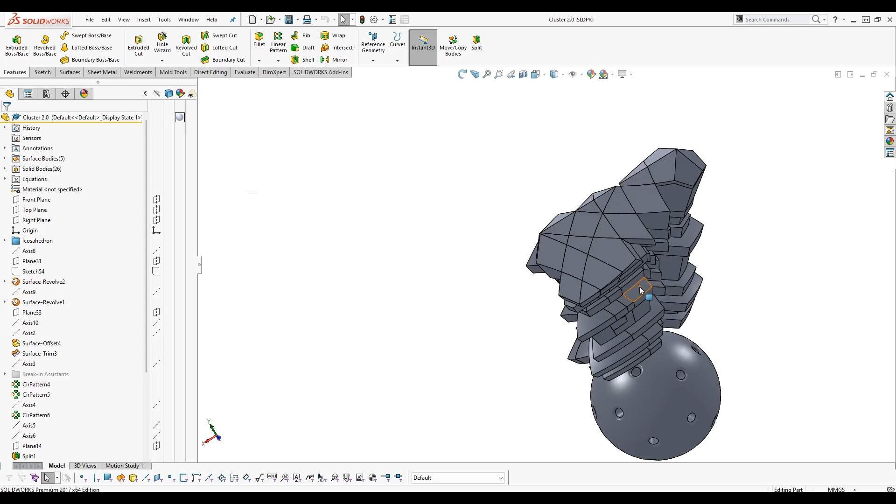What I've made so far is what engineers call a master model: a multi-body part that consists of one of each unique part on the twisty puzzle. This is an upcoming puzzle that I haven't presented yet because the first version didn't work so well. But this new mechanism is looking better, and so I'm ready to start the cleanup process so I can get it printed. Cleanup is a long and involved process, and it often takes many hours to implement.

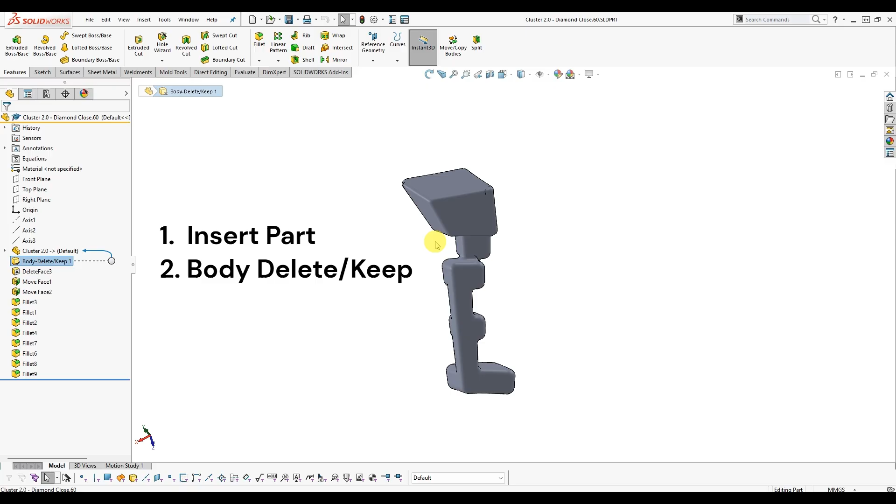This is what we're going to end up with by the end of the video. You can see each of these steps of it in the final result. We're going to insert the part. We're going to delete down to the part we need. We're going to delete faces to clean things up. We're going to move faces in a few different ways. And then we're going to do a whole bunch of fillets.

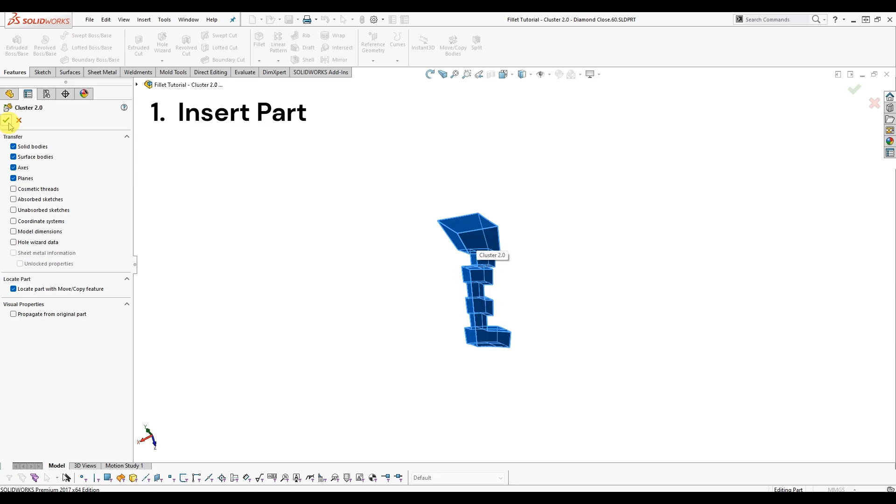So let's start from a clean part. The first two features in a parts file will always be an insert part and a body delete or keep. Insert part pulls in the whole master model file. You can just select whether you'll include the solid bodies, the surface bodies, the axes, the planes, cosmetic threads, all sorts of things. It's pretty unusual to need anything except for the solid bodies and surface bodies. Sometimes I bring in the axes and planes. In this one I actually brought all of it in.

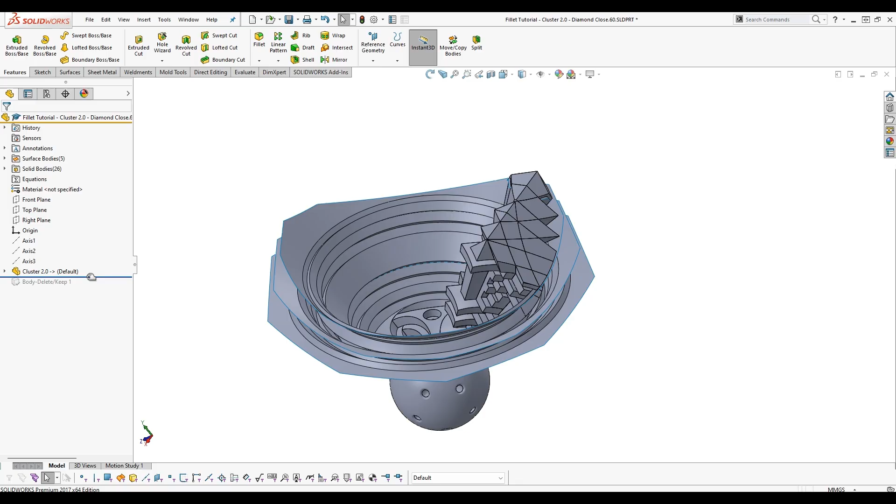And if I scroll back here, you'll see that it actually brought absolutely everything in, including these surfaces that I use to cut the parts, which are sometimes useful in the cleanup process. But in this case, I don't really need them. So the second feature is the body delete/keep. This lets me delete down to just the part I want in this file. I usually do keep bodies. You can do delete bodies, but that makes you have to select the things you want to delete. Here I say keep bodies, and I just select the one that I want to keep, which is a lot more efficient. I hit OK.

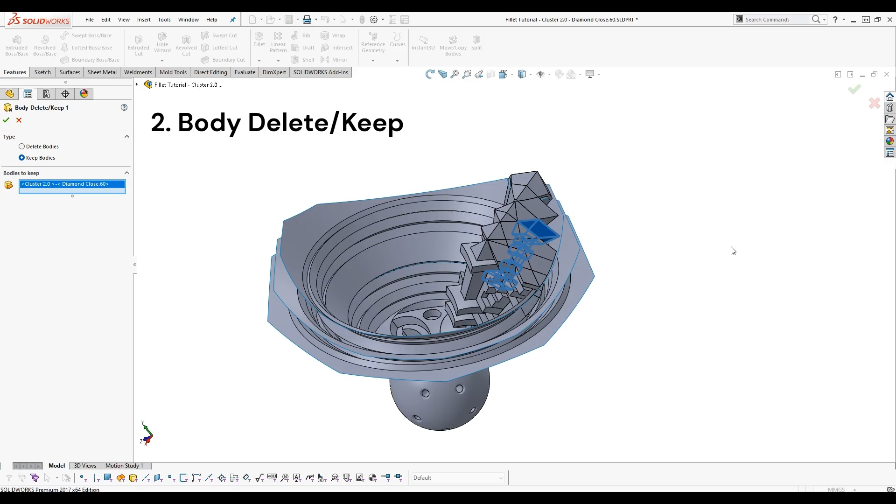When I'm starting the cleanup process, I usually save all the parts out in quick succession, and I do it like this. I start by putting these two features into the model. I go to insert part, select my master model, and then hit submit, and that puts this in here. Then I do a body delete. I go up to the solid bodies folder, find the one that I want to keep, and say delete/keep body. You can also access that by turning on your selection filters toolbar and selecting bodies, and then you can right click here and say delete/keep body. I always have this toolbar visible because it's useful.

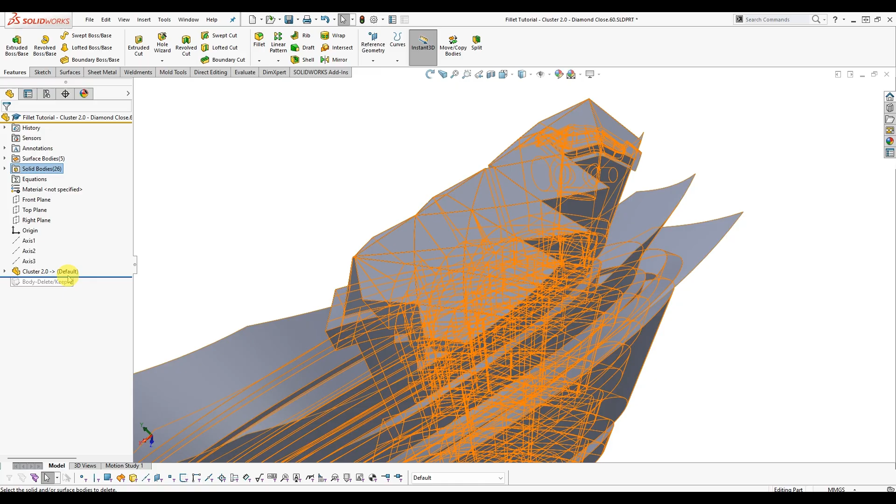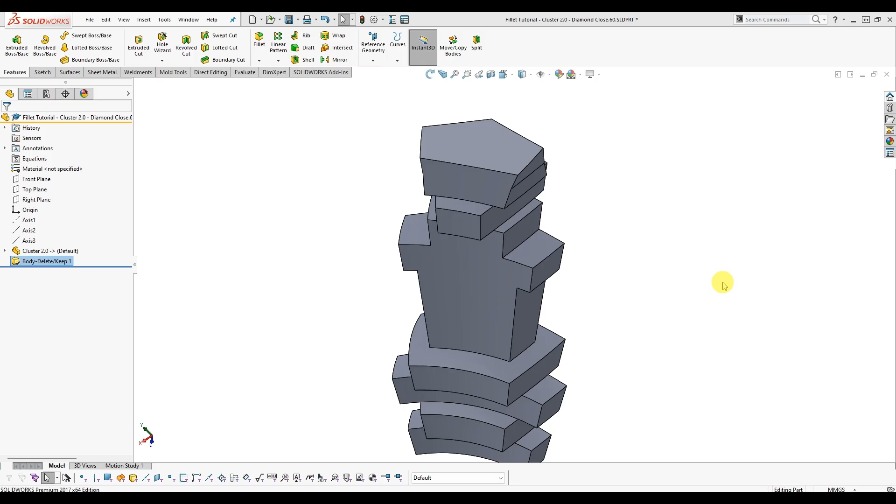Alright, in any case, let's scroll back. Now I've only got one part, so what I do is I go and edit the body delete, choose the next part, and then I do a save as to the name of that new part. I'm not going to do that now. I've already done it for the rest of the puzzle. But I just do that in quick succession until I've gotten through all of the parts. This puzzle has 26 unique parts, so it kind of takes a while. But I want to get all of them into place. And then I start into the first stage of cleanup.

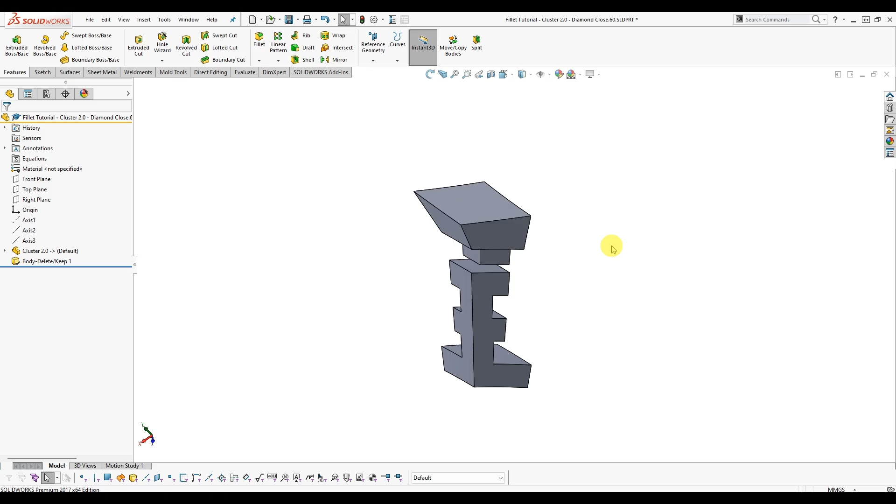The process of making a twisty puzzle in Solidworks always leaves a lot of faces that are unnecessarily split, like this. These are all tangent to each other, but for some reason they're split up. And that happens in several different places on this same part, including underneath and above.

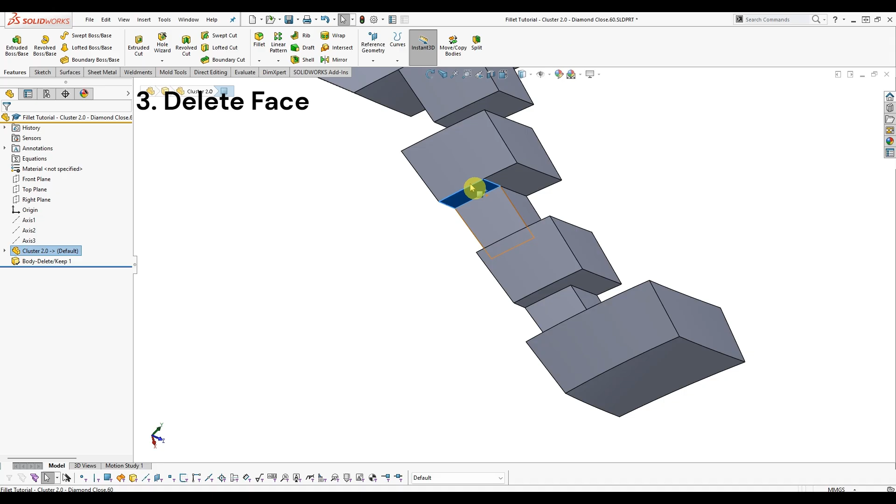You can see the edges of those split faces by going to View, Display, Tangent Edges Visible. I'm very used to seeing these things, so I actually keep the view of them off. I'm very used to knowing that they're there, but for this tutorial I'll put them on because it helps you guys see it. What I'm going to do is a rather finicky feature, but I've discovered some good tricks to make it work pretty consistently.

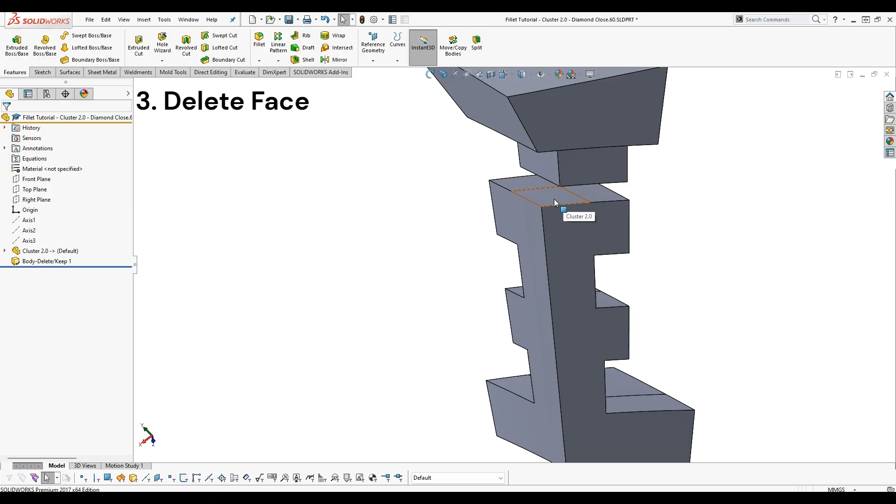Right-click on one of the faces and click Delete. It's under the Face section. You may need to expand this. So click Face Delete, and now you're in the Delete Face feature. And then you select all the faces that make up that split face, except for one.

The exact one to leave behind doesn't exactly matter, but I've found that SolidWorks can be kind of picky about this. You have to do some experimentation. Actually, occasionally, if you just select one of them, it'll work, but that's only if the other ones are completely disjoint. But in any case, show preview sometimes works, sometimes it doesn't.

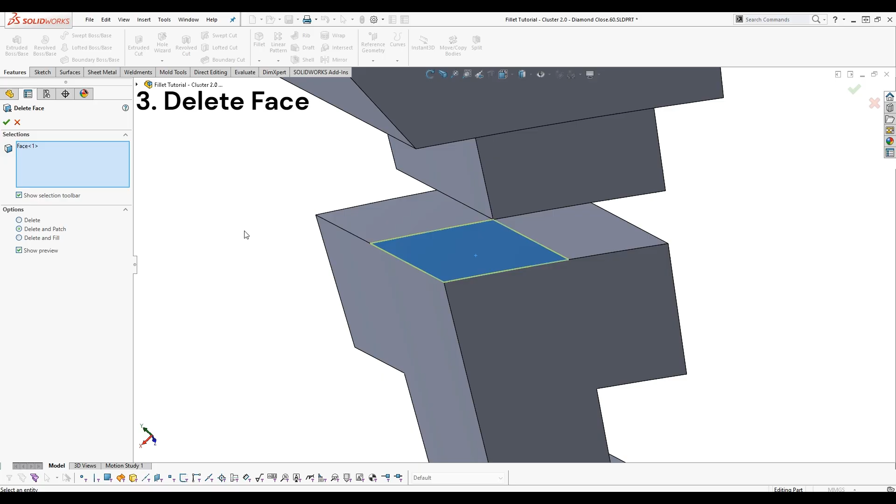But really, the point here is you select Delete and Patch, and then you hit Enter. And now we're left with a single face. That's the goal. You want to have a single face on each of these. So I'm actually now going to go back into that Delete Face feature and move on to my next one. And try that and hit Enter.

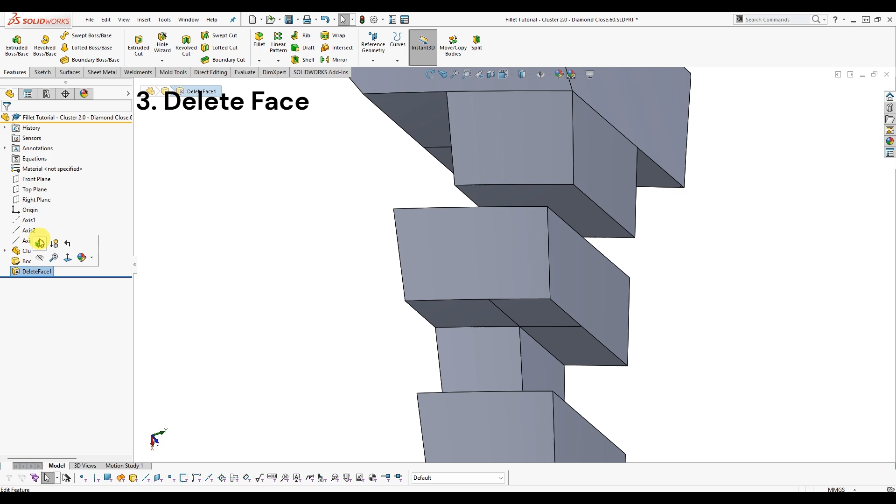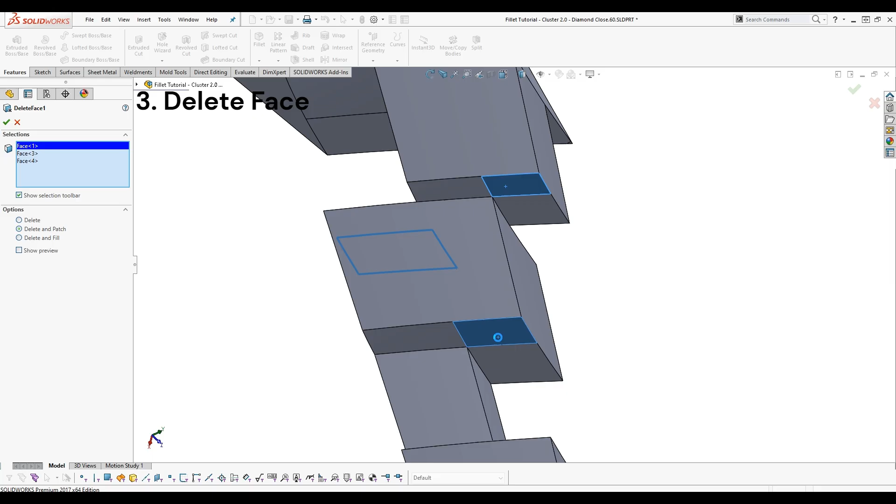Good, that one's solved. Now occasionally it won't, which is why I'm only doing it one face at a time. But if I go like this, it may not solve. Oh, it did. Let's see if I can get an example where it doesn't. Okay, well, we'll see if we come across one. But in any case, the goal is to end up with each of these things being just one face. So I'm going to quickly go through that right now.

And again, I'm checking each time to make sure. Let's see if that works. Aha, there's a time when we get a rebuild error. For some reason, it doesn't like this, so I'm going to try that. Great, it liked that. All right, so we've got one face on each of these.

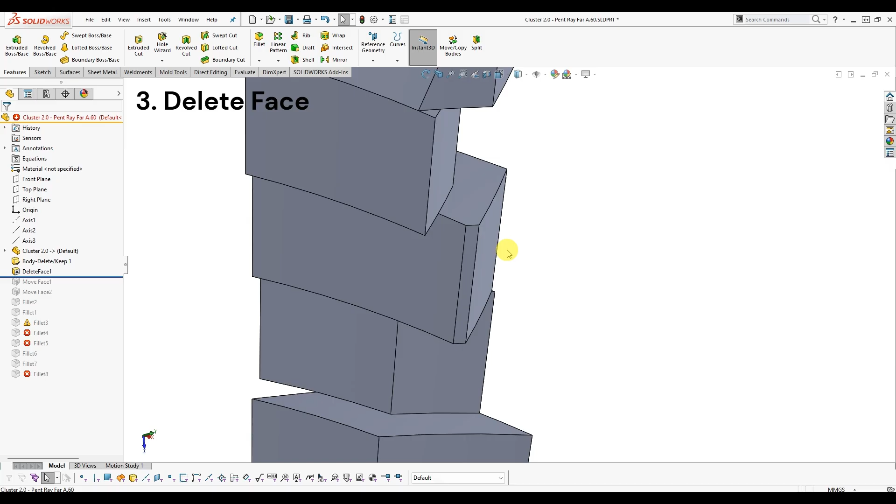Delete face is also useful for slivers like this. I've opened another part to show it. Without deleting that face, there's just this little sliver here, and that's going to make fillets really complicated. And so what I do is in my delete face feature, I also include this guy, and now it ends up straight. And the fillet that I'm going to end up putting on this edge is going to just blast right through the material that I just added, so it's no big deal.

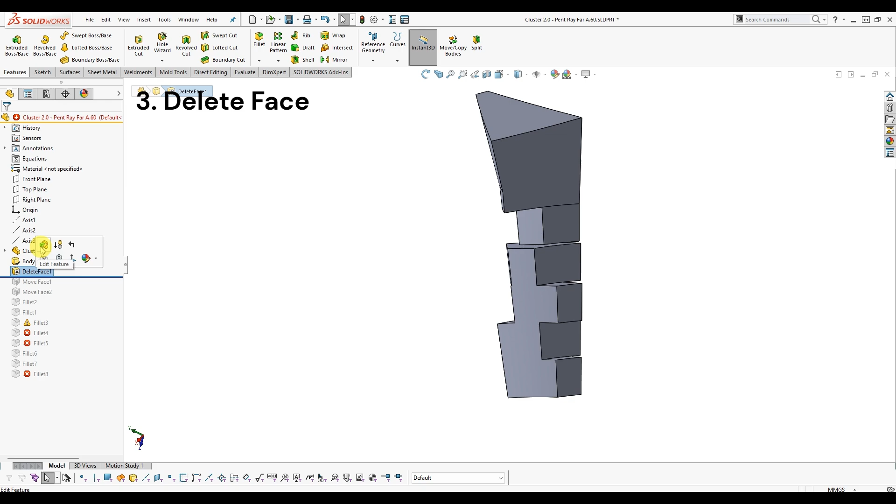And you can even get away with it on something like over here. I've actually already gotten away with it over here, so I got rid of this sliver as well. So it's very useful. It makes the faces that are next to it extend until they meet each other. You see that? So they come to an edge like that, and that makes it so that I only have to select these guys in order to fillet it.

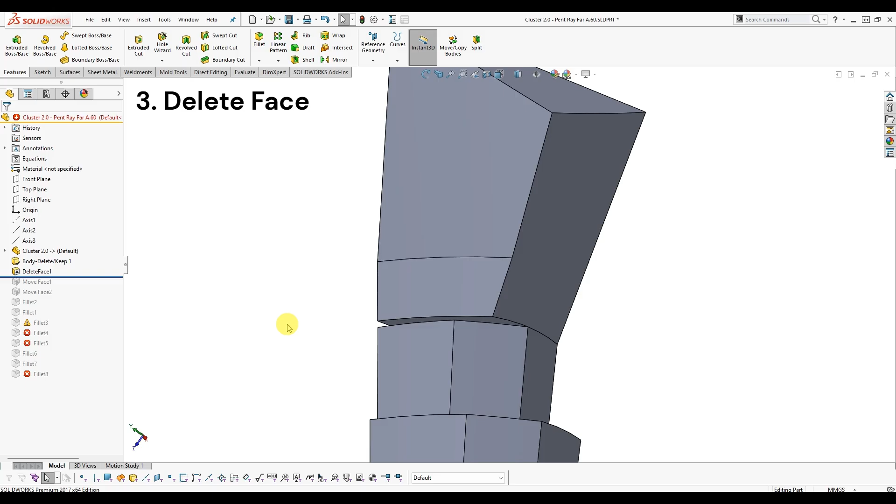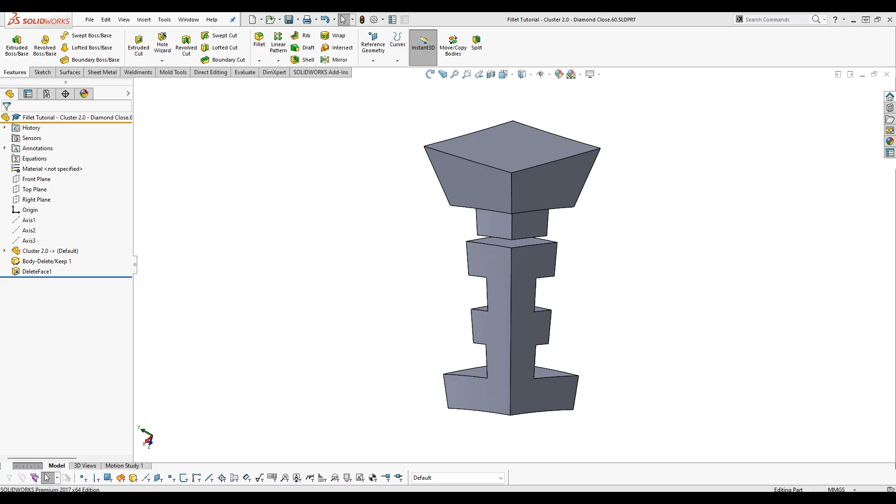So let's move on. Let's go back to the other part. Okay, so we're back here. Gonna hit save. Always good to save a lot. Once you're done cleaning up faces, it's time to move on to clearances. A mech puzzle needs to have clearance in specific places throughout the mechanism. You may have heard this called tolerance, but as an engineer, that word means something completely different to me, so don't get me started, just call it clearance.

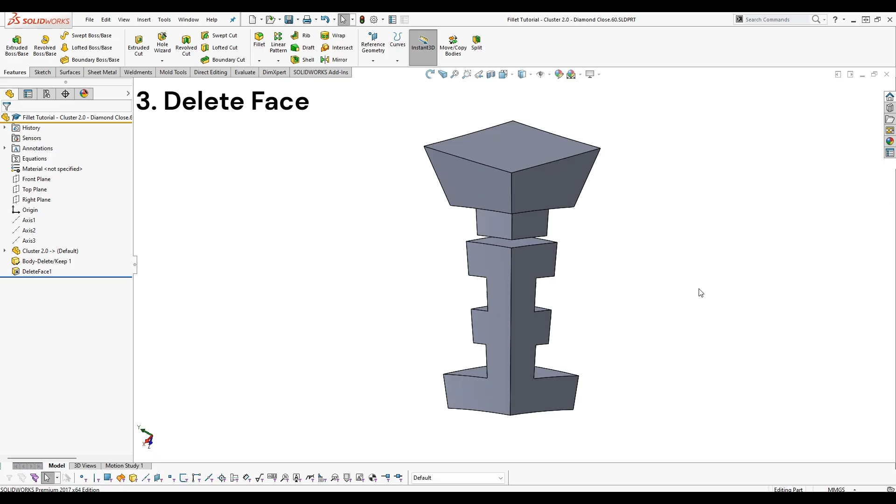In this video, I'm not going to go into why I pick certain faces and leave others alone. That's a topic for another video, which I might make someday. But what I'm going to show you in this video are two very important steps that will help make fillets more streamlined later. All pieces should have a move face feature for clearances. I usually do 0.3 millimeters for SLS puzzles.

I'm going to put the clearances on this face and this face. There might be another one that I end up doing a little later. I haven't worked all of them out for this puzzle yet, but let's just assume it's these ones. So I do flip direction. 0.3 millimeters. And so you see it's going to shift this face upwards and this face upwards.

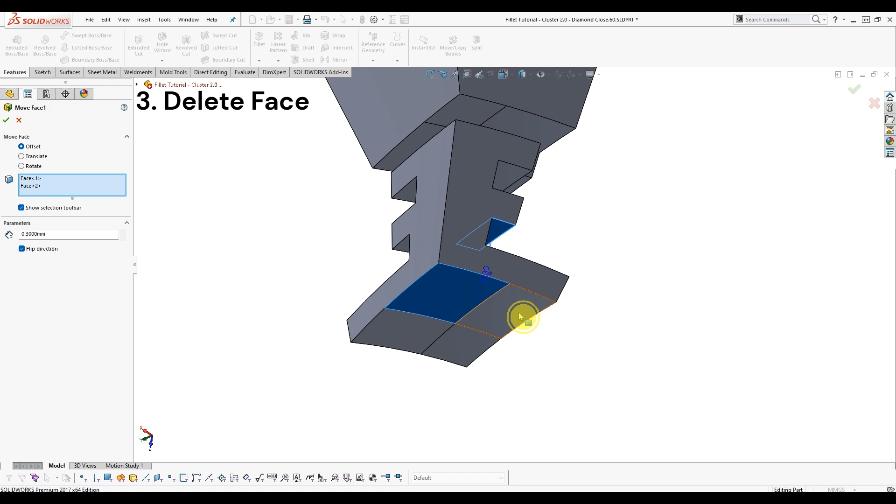And since we already deleted the faces, it's actually going to make this a lot simpler, because before deleting those faces, notice we would have had to select 4 things on this face and 3 things on this face to get the same result. So doing those delete faces makes this step a lot simpler. So I'm going to unsuppress that so that everything solves.

Okay, now many pieces, including this one, will need a second move face feature for a different reason, but let's skip it for now, and we'll come back to it when we realize it's needed.

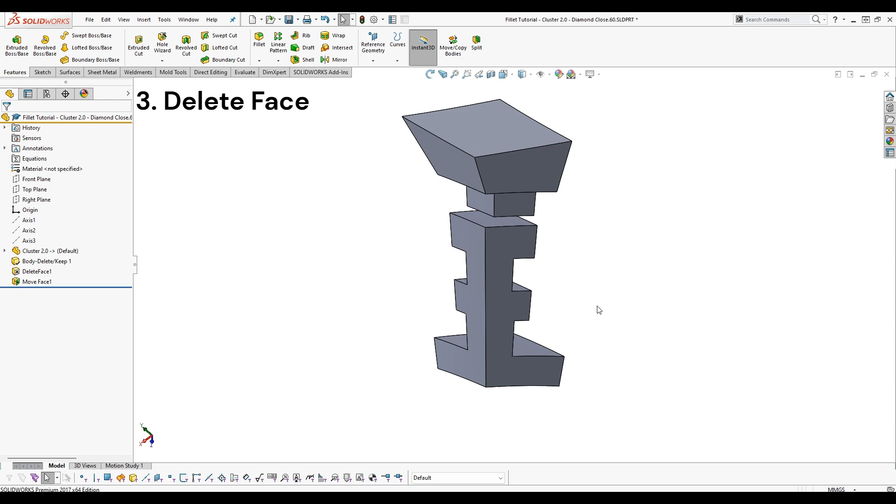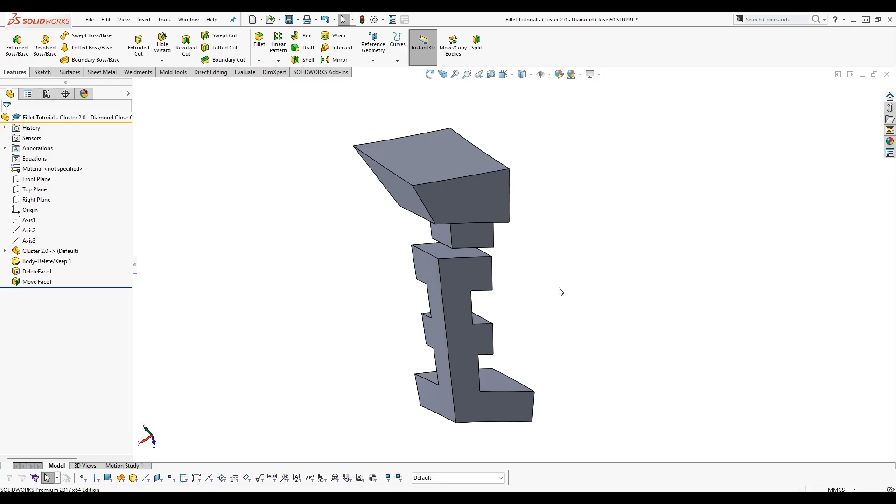Now it's time for shells. This is probably the best place in the model to shell if needed. If you're doing SLS, it's good to shell the parts to about 0.8 millimeters to 1.5 millimeters to save material cost. If you're doing FDM, completely skip shells. I like to shell before fillets, and just to make sure that my fillets are never bigger than the thickness of the shells to avoid any self-intersecting geometry.

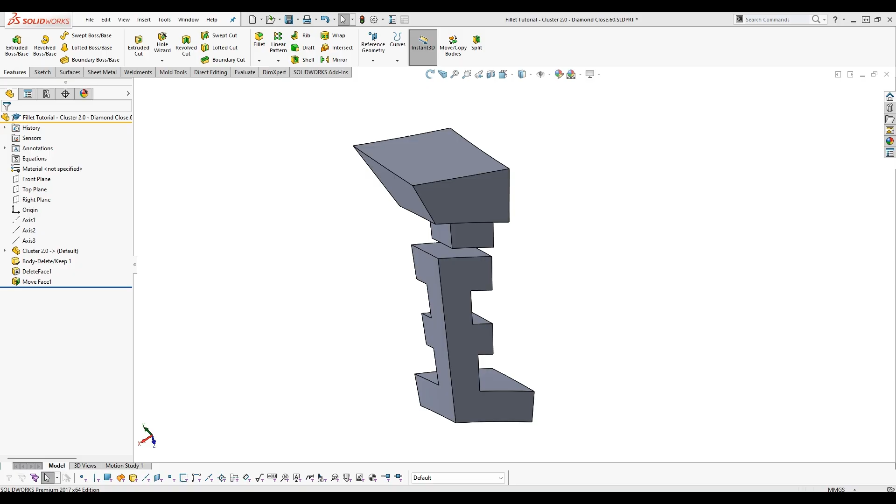I'm not going to shell this part at all, since it's already super spindly, and it really doesn't need to be any lighter. So let's move on to the star of the show, fillets. For my puzzles, I like to do my fillets in 5 stages. Prep fillets, radial fillets, shell fillets, reinforcement fillets, and face fillets.

There's a lot of nuance to how the fillet tool works, and it takes years of practice to understand what makes it break. In my nearly 2 decades of designing puzzles, I've come up with a workflow that's pretty resilient to minor mechanism updates that I may need to make, and it really cuts down on the number of fillet features in each file. That saves me a ton of time. So this is the order I usually do fillets in, but let's actually start by explaining shell fillets, as it will help motivate the reason I do these after I finish prep fillets and radial fillets.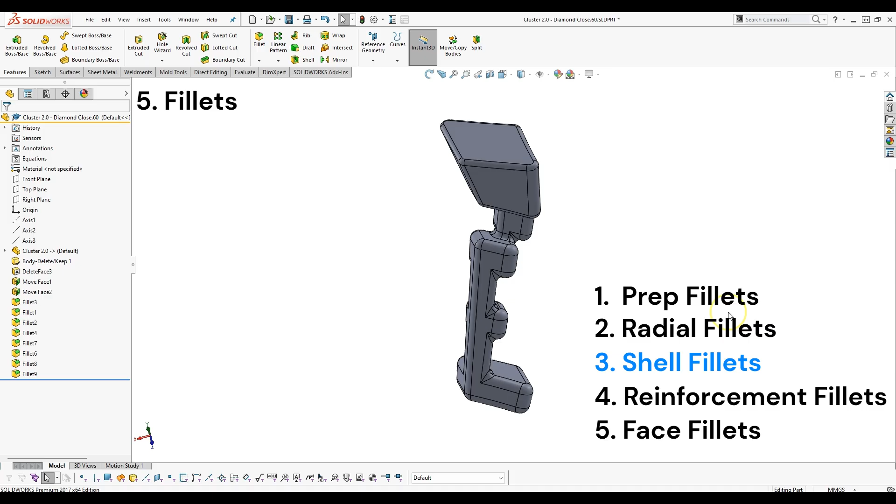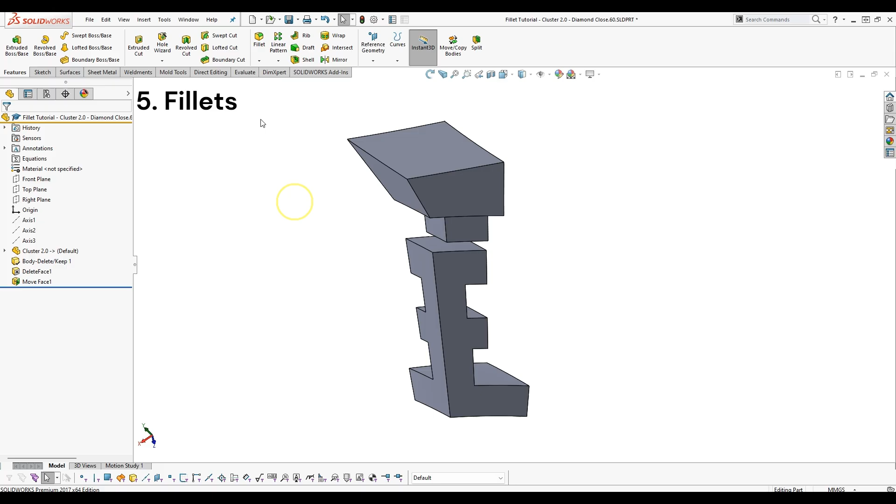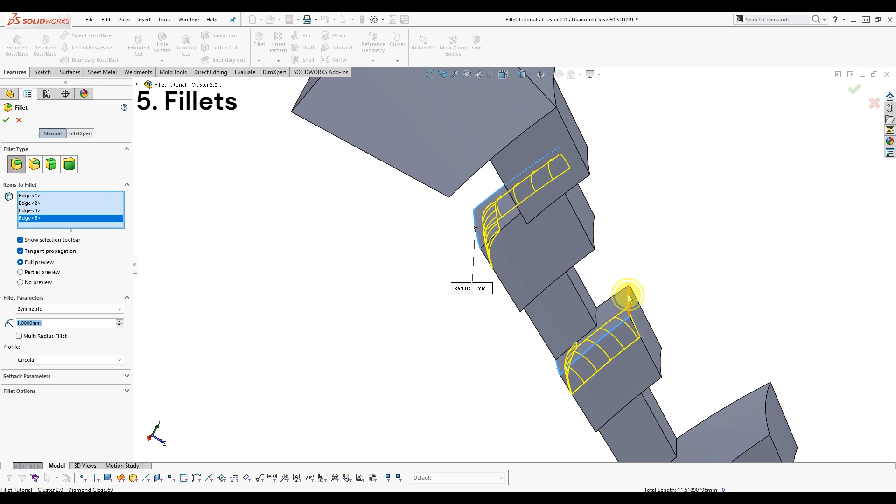These are shell fillets. Shell fillets are the convex fillets that go on the curved edges of each shell. You could start with these fillets. So you could start with these, say 1 millimeter, but there's a few problems with them. First off, it involves a lot of clicking. No one likes a lot of clicking. Like, I have to click each of these individually.

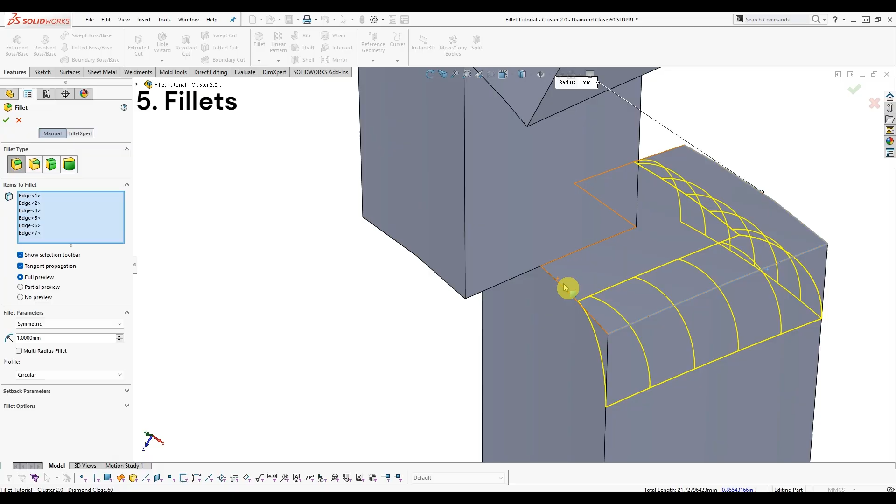Second, you can't use a single fillet feature to do this edge right here. You can do this. Oh, you can't even do that one. Fun. This will actually make it break because these 2 surfaces are co-radial, and it doesn't like that. So we need to fix something there.

And finally, selecting a lot of individual edges makes it a lot more vulnerable to rebuild errors if you make even minor changes upstream. So the way we minimize the number of clicks during shell fillets is by carefully preparing the model to take advantage of a thing called tangent propagation, which is this checkbox right here. But I'm getting ahead of myself. Let's rewind back to right after our move face feature and talk about prep fillets and radial fillets.

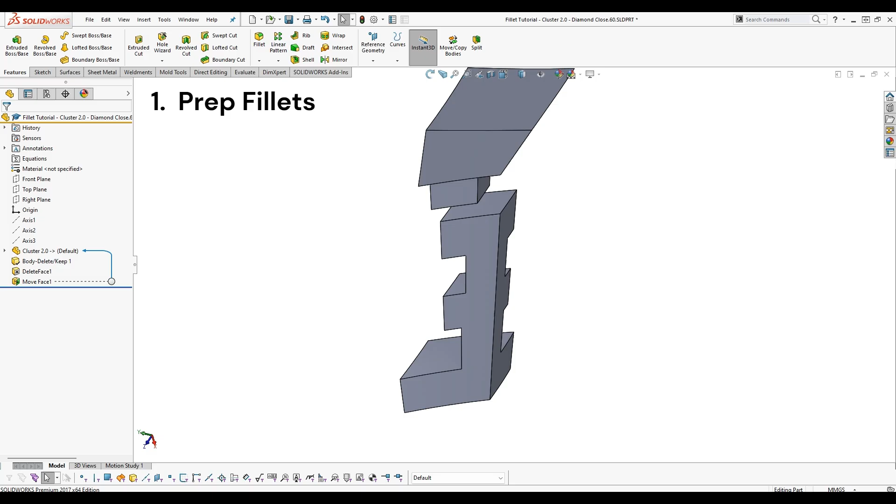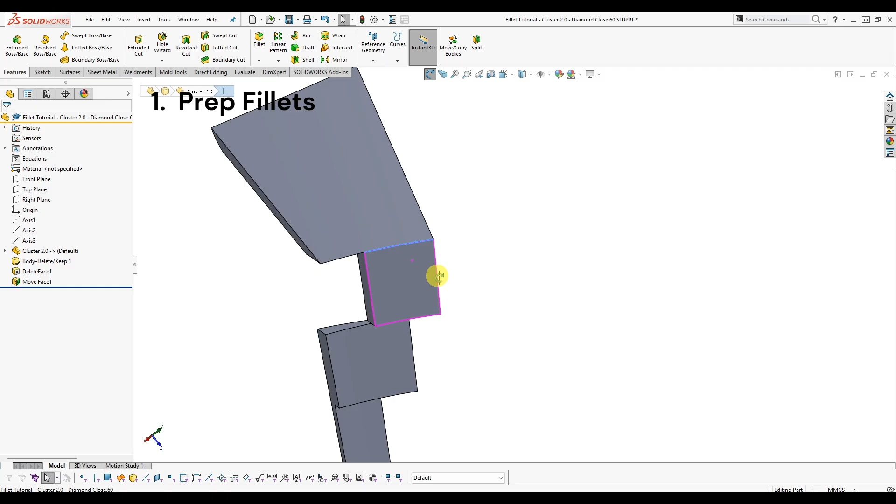In most twisty puzzles, there's usually this outer section of the cut, these faces right here, where the transition to that part of the cut results in edges like these, where these are conical surfaces. These might be conical surfaces, but these surfaces towards the outside aren't actually coincident with the origin of the puzzle, usually. And so that creates this little transition here. And I like to fillet that first. So the first fillet I do is usually a 1mm transition fillet right here.

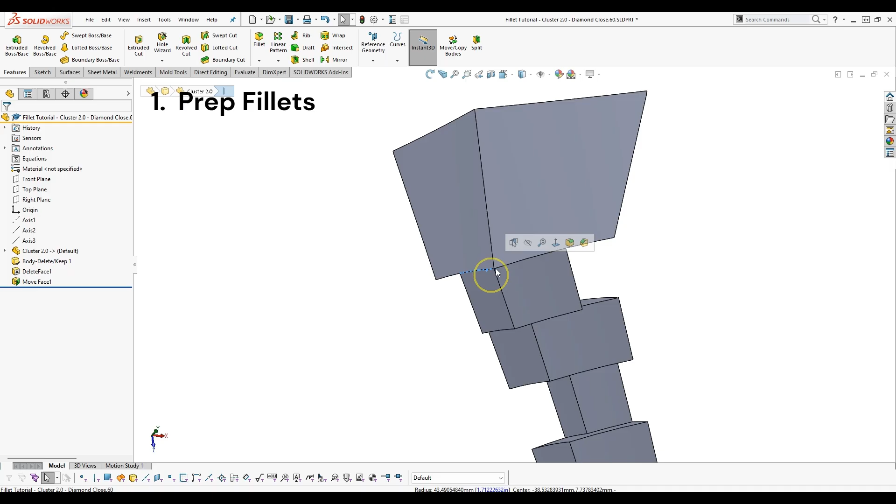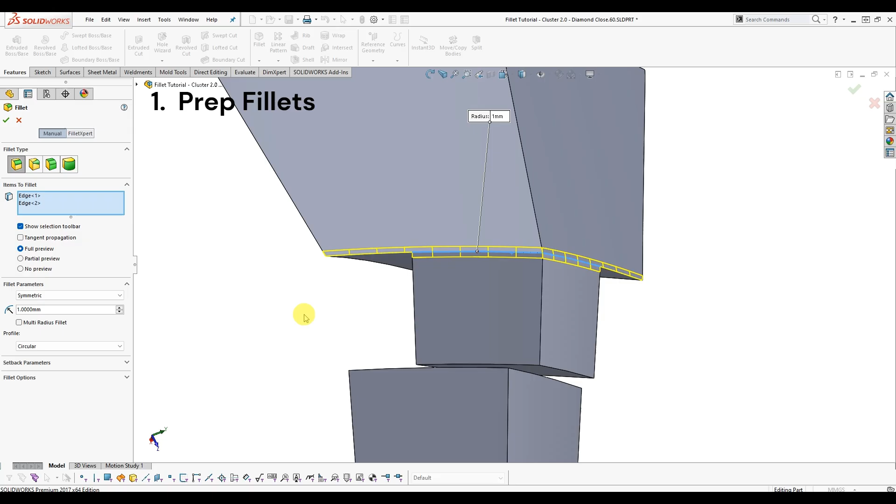So let's fillet these guys. And we have a little bit of a, oh wait, that was 10mm. Hey, one still won't solve. Okay, fun. For this one, we turn off tangent propagation, and now it'll solve. Okay, cool. Again, nuances. So some of these pieces will actually have a concave edge right here. Putting a concave fillet on it.

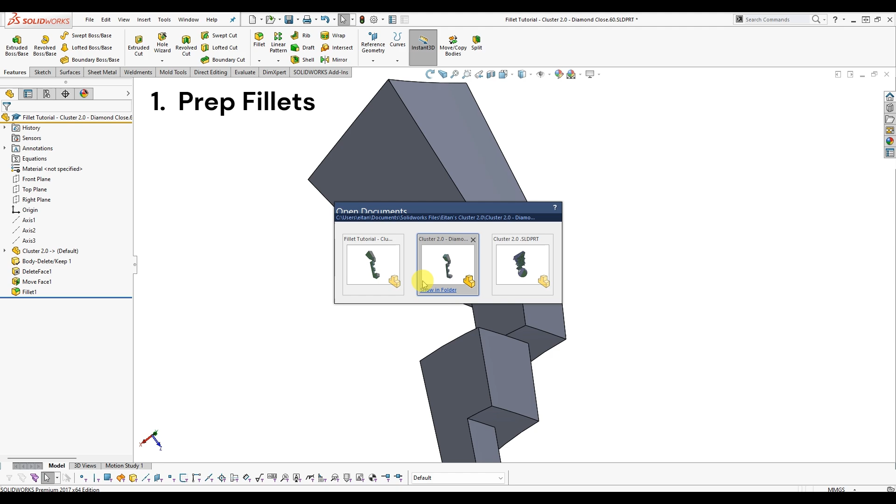I'm going to go back to that other file I had open. And you'll see that the first fillet I put on here is a concave fillet. Let's ignore this guy. So right here is a concave fillet. You might be surprised that I put a concave fillet on here. Won't that interfere with the piece that's next to it?

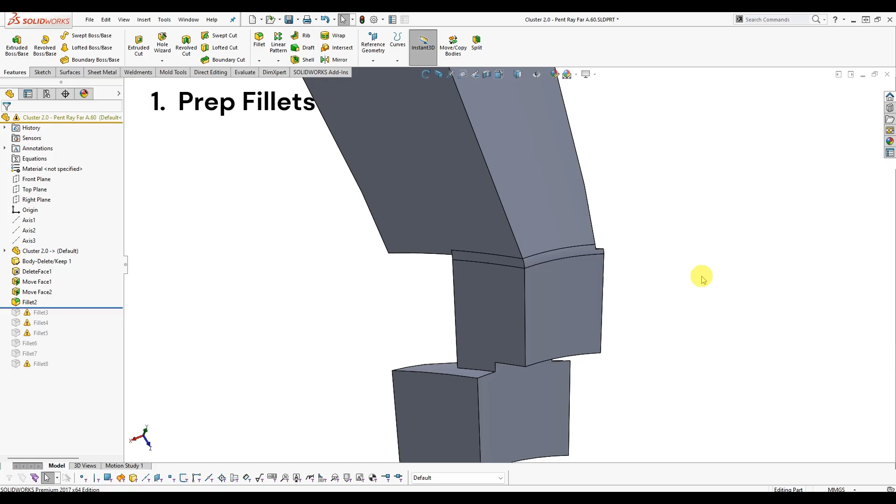But don't worry. There won't be any interference with the part next to it as long as it has a convex prep fillet of equal or greater radius in the same spot. And it will, because these are really helpful for simplifying the rest of the puzzle cleanup down the road. So let's go back to that other piece. So now we've got those prep fillets right there.

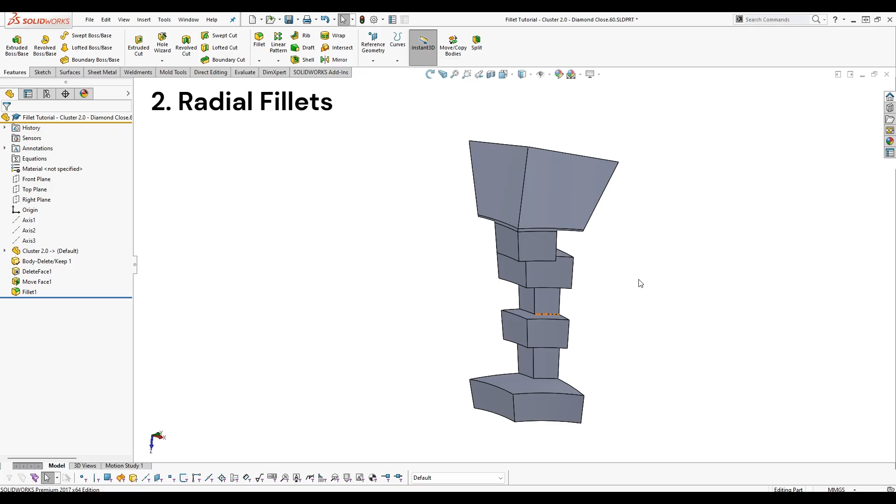And let's move on to the meat and potatoes of the filleting process, radial fillets. This is the step that's going to require a lot of clicks no matter what. And it sometimes requires more than one fillet feature with different radii. I start by trying to put a 1mm fillet on every radial edge I can. On puzzles with fewer parts and puzzles with bigger parts, I've gone higher, 1.5, 2, sometimes even as high as 3.

Some of these edges down here, I might try to put a 2mm fillet on, but let's just do a 1mm fillet everywhere we can. Now, notice this little window that keeps popping up every time I click on something. That is called the selection assistant, and it's actually really useful.

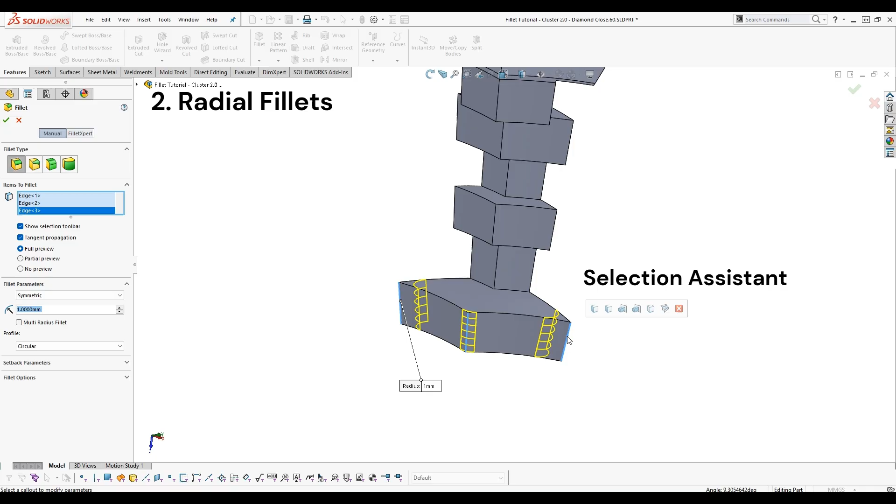When I hover over these buttons, it highlights different groups of edges. So some of these are a lot less useful. Like this is all convex edges. That's too many edges for right now. It won't solve. This is all edges. These right feature, left feature, internal to feature, those are a little bit complicated and I don't really use them often. What I really use often are connected to start face and connected to end face.

They don't always both show up, but what's nice is notice I clicked this edge and it's saying that these other 3 edges are connected to that start face. So I'm going to click those and it's selecting all 3 of those. But you know what? I don't really want to select those right now. I think I want to use a smaller fillet for that area, because it's eating away at a lot of it.

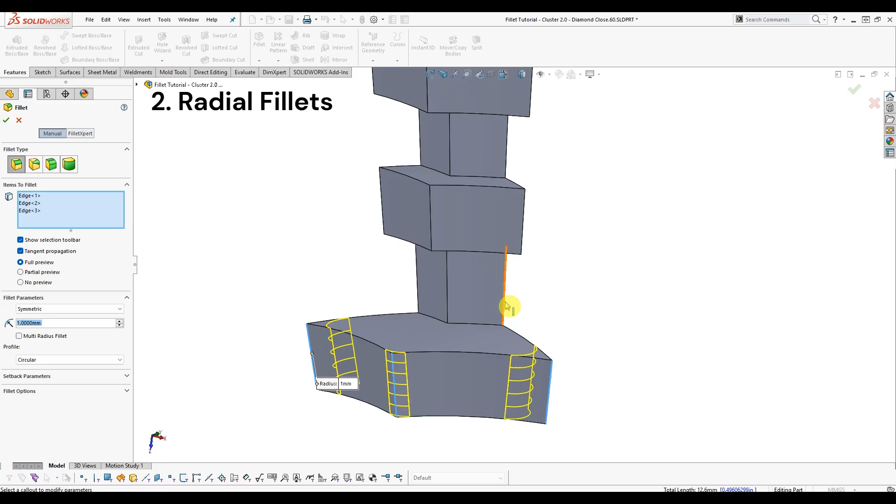Notice I'm going one edge at a time, except for these selection assistant things. But I'm going one edge at a time to avoid things that are going to break my model. Because if these yellow previews disappear, it means that the last thing I clicked made this feature not solve. So I'm going to actually skip these guys and maybe do these ones.

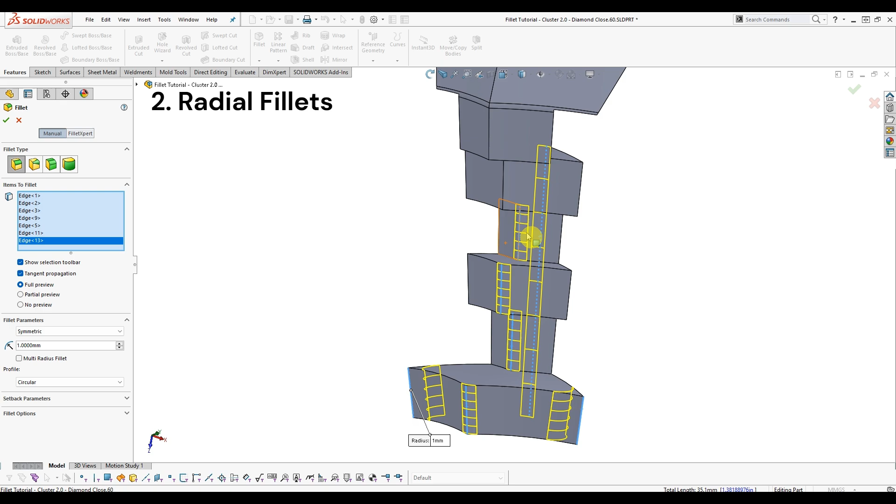See, all the previews disappeared. That's probably because these edges ate away at my model. Okay, so what I'm seeing is that these guys are going to need smaller fillets over here. So I'm not going to worry about these yet. But I think I can do this one, this big one here. I want a 1mm fillet everywhere I possibly can.

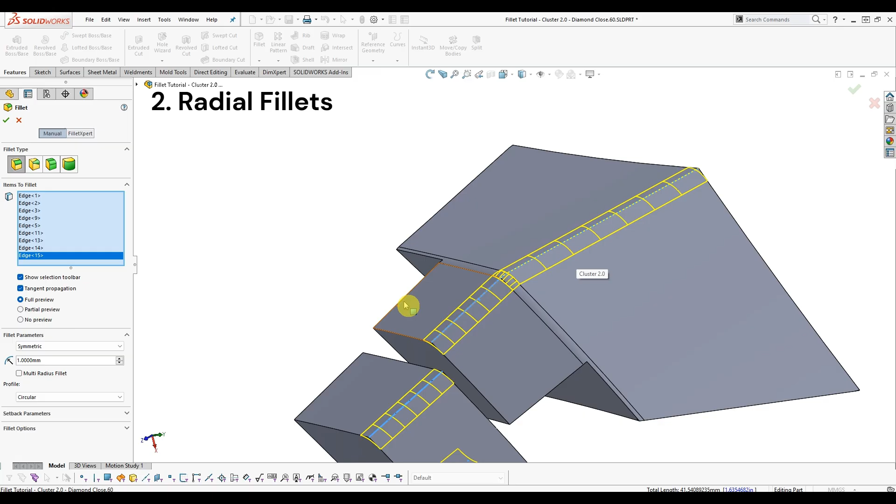Alright, so now here is the benefit of doing that prep fillet. Notice that before that prep fillet we would have had to select both of these. But because we have tangent propagation checked, it's going to actually spread across the rest of this edge. And I only have to click once, where otherwise I would have had to click twice. Every click matters. It's nice to skip clicks when we can.

So I'm going to do these. I'm going to do all of these up here. All these radial ones. And notice it propagated all the way down through here because I have this fillet here. Okay, and I think I might do these ones. Oh no, it's going to break.

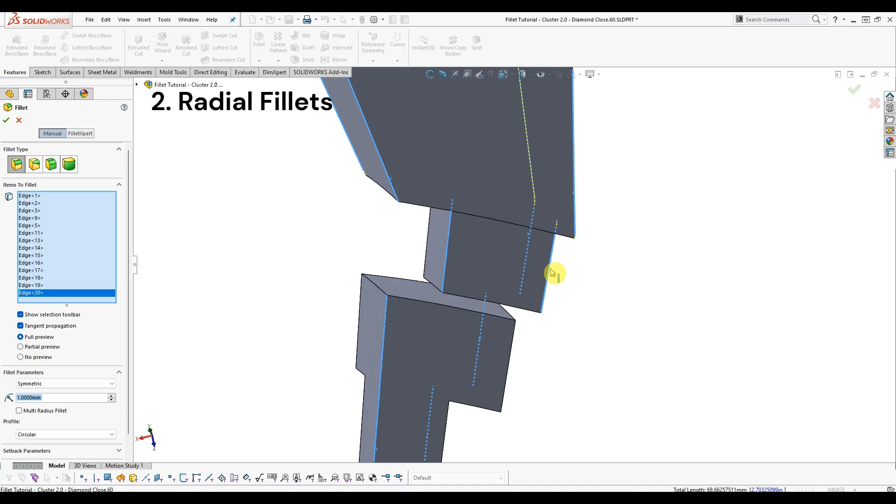Alright, now when something breaks, what I do is I actually lower the size of this fillet and I watch as it kind of sweeps through this. And I try to understand why is it breaking. The reason it's breaking is because the fillet is about to cross this point right here. Right there. So I'm going to unclick that one, and I'll do that one in a second fillet feature.

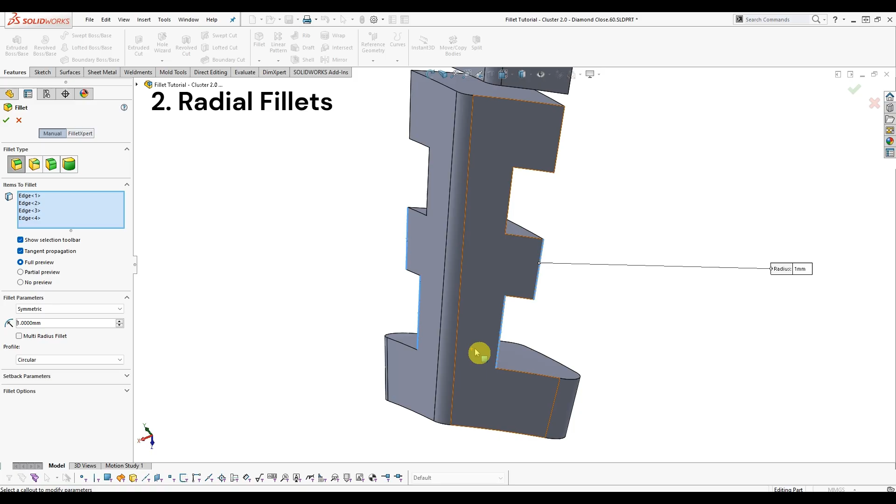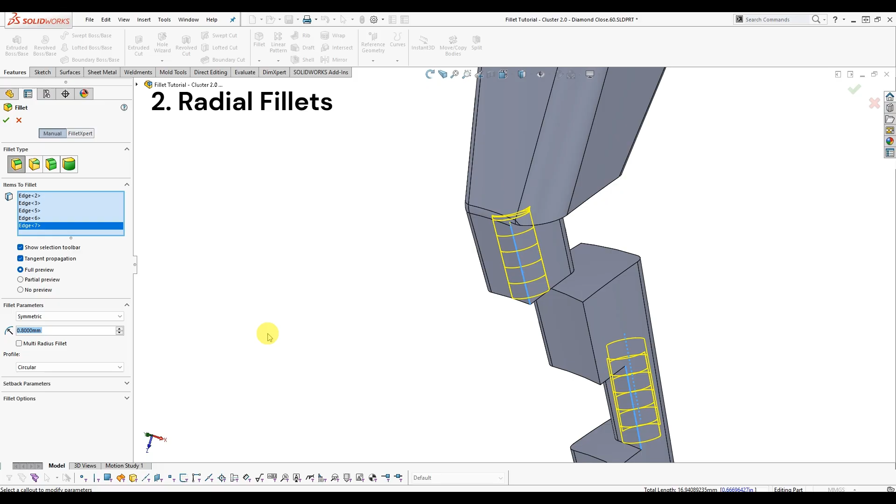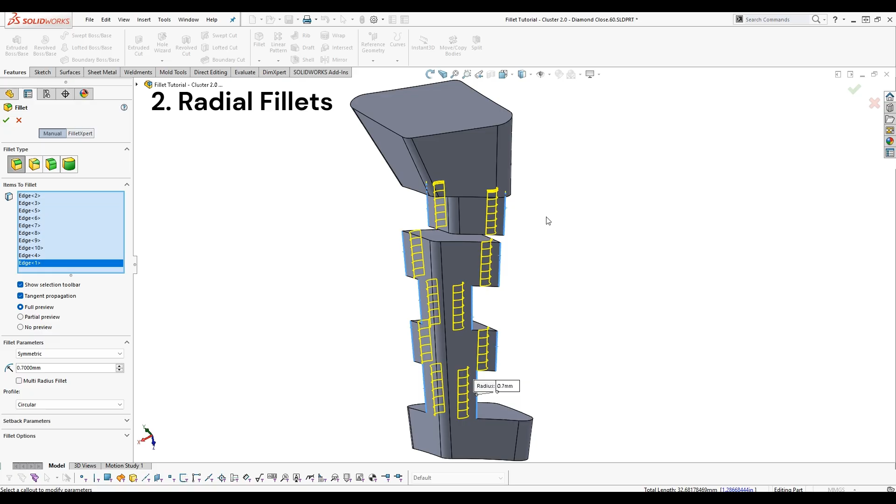You hit enter, and let's do another fillet feature at 0.8. How about that? And, oof, this puzzle has a lot of small pieces. So I'm going to do these guys. Oh, that's better. Ooh, it still doesn't like that. Let's go down to 0.7. Sure. Alright, I think that's everything. That's all my radials done.

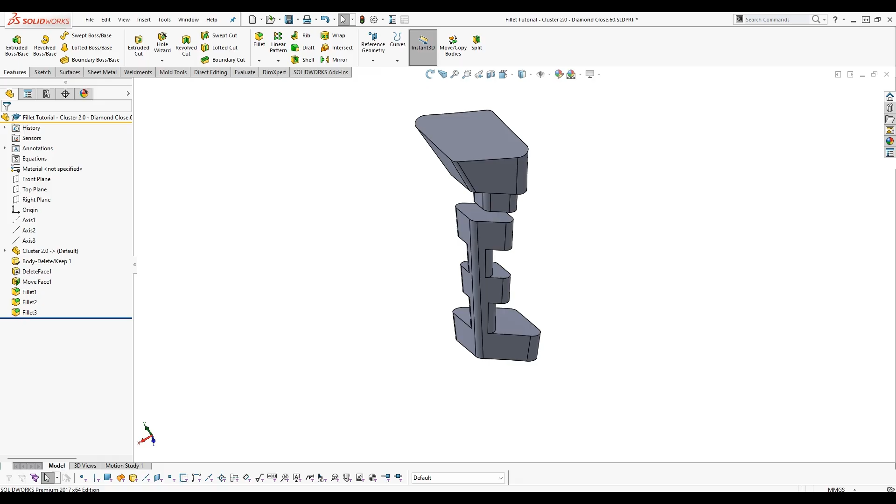And so let's move on to shell fillets. Because of all the preparation we've done already, I can usually do the shell fillet in a single feature with very few clicks. So, see how when I click one of these edge segments, it does the entire shell edge. That's because we already put in these radial fillets, and so tangent propagation makes it select the whole thing. This is great, but I can do even better.

A good thing to know about Solidworks is that it is much better at keeping track of faces than it is at keeping track of edges. So, for the remainder of the cleanup steps, I'm going to find every opportunity to select faces instead of edges. When I select a face, the fillet tool will throw a fillet on any sharp edges connected to that face. Since I already put fillets on these two edges, that just leaves the shell edges connected to that face. So I just have to select that one face.

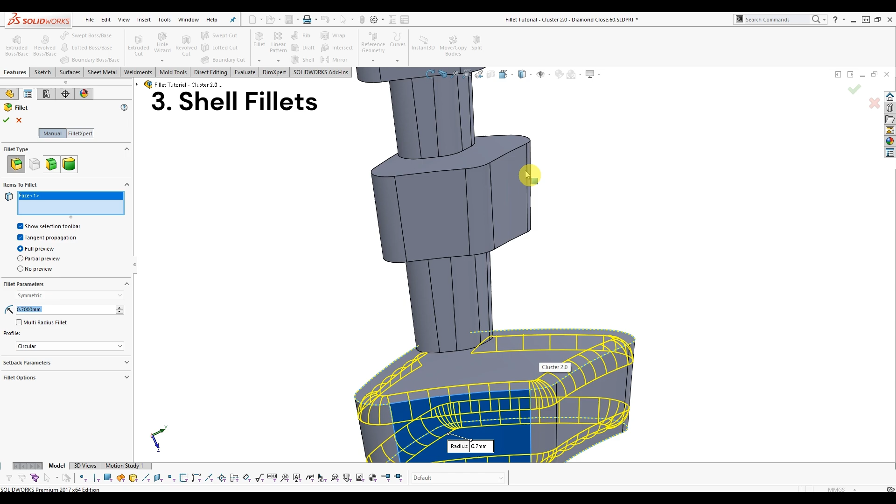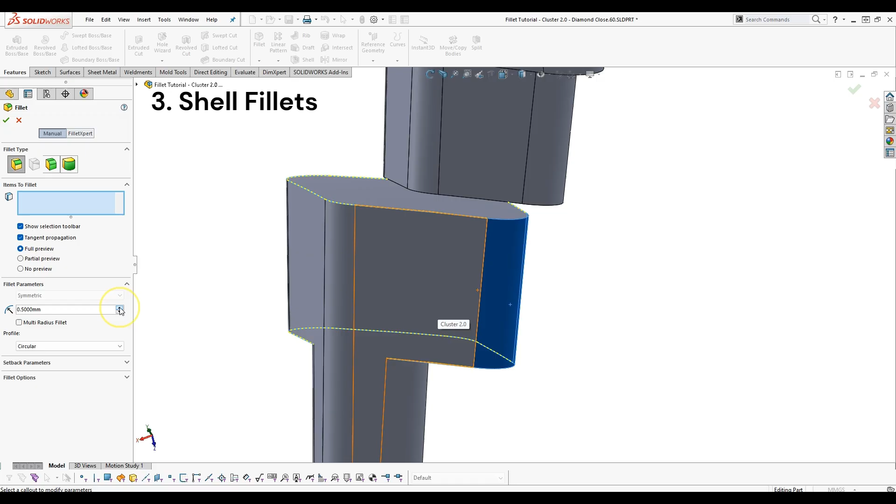I'm going to do the same thing up here. Select a face. Same thing right here. And this is a little bit iffy, selecting a fillet face, but you know what? I'm going to do it. Uh-oh, something broke. Interesting. Well, let's reduce the size, see if that helps. Huh. I went down to 0.1 and nothing helped. So let's bring this back up to 1. And unclick. Okay, we're back.

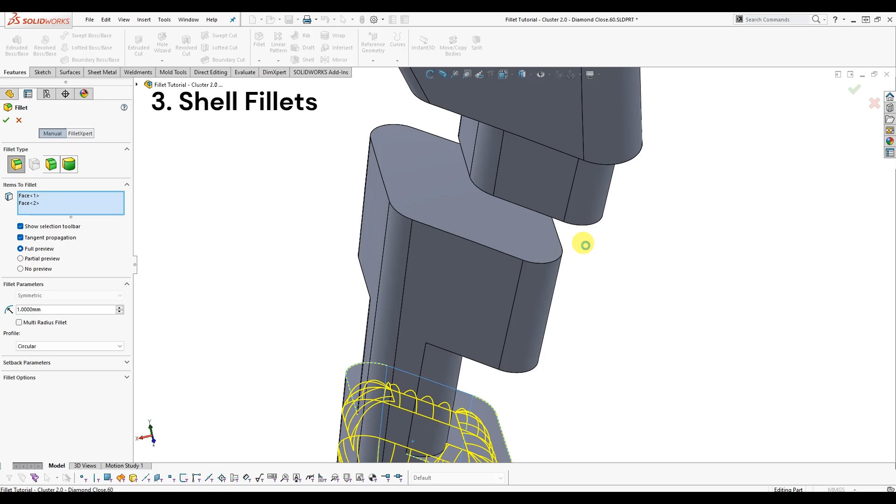Well, that's weird. Huh. Okay, the reason that it's breaking is because of this point again. Remember I said that many parts will have not just one move face feature, but 2 move face features? This is why. Let's roll back to that part of the cleanup.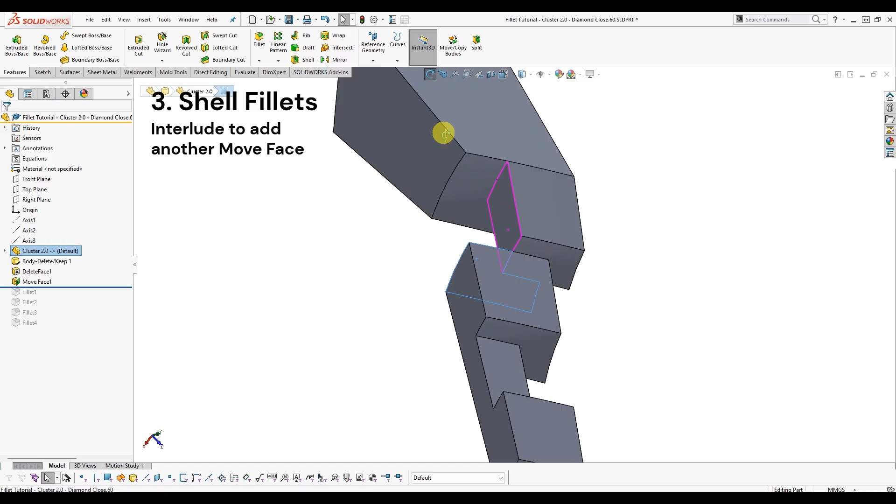And add a second move face feature right here. Anywhere that we don't add clearance, let's check to see if there are 2 faces that meet at a single point because they're co-radial. I see one right here, and I think that's the only one. Some pieces have lots of these.

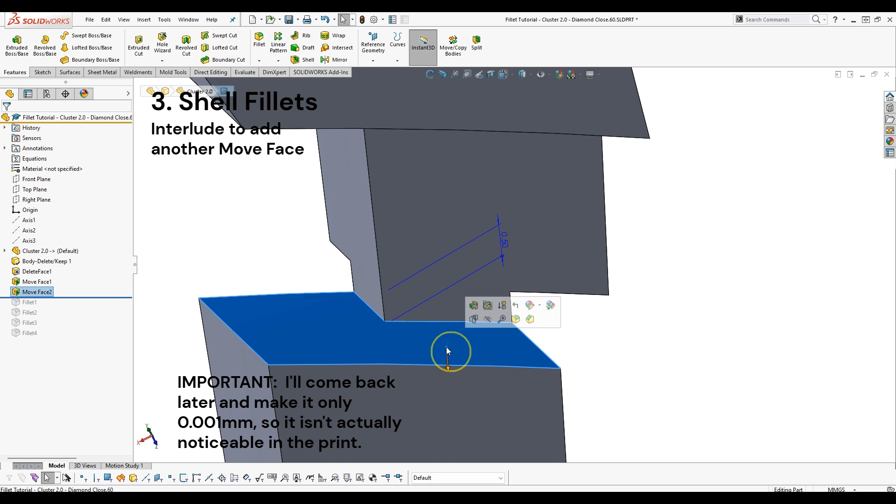So what we're going to do is we're going to move this face. Let's make it 0.5 for right now, just so you can see what's happening. So what happened is I shifted this face downwards, and that created a new edge here. So now when I fillet this edge, it now knows what to do with it.

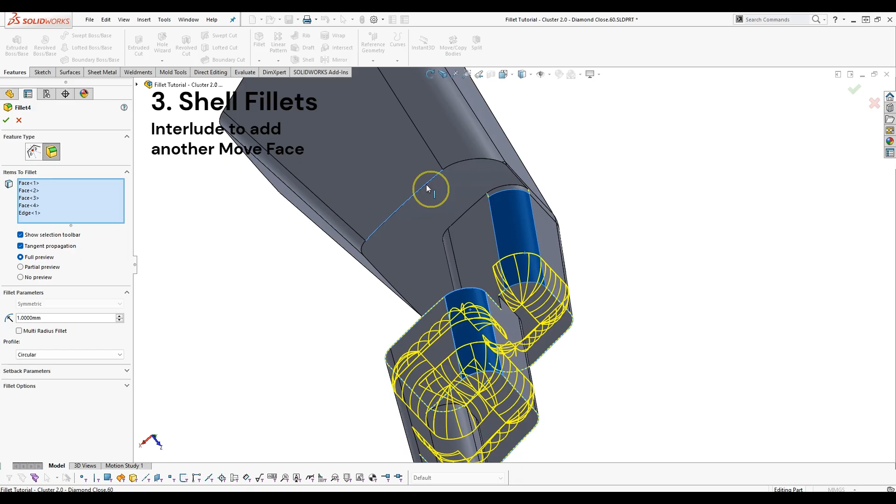Let's scroll forward past our radial fillets and edit the shell feature. Sorry, edit the shell fillets. So now we can select this guy, and it will fillet, and we can select this guy, and it will fillet, and we can select this guy. Oh, let's not select that because I want to do something special up top. For this one, I'm just going to break down and select an edge. It's going to be okay.

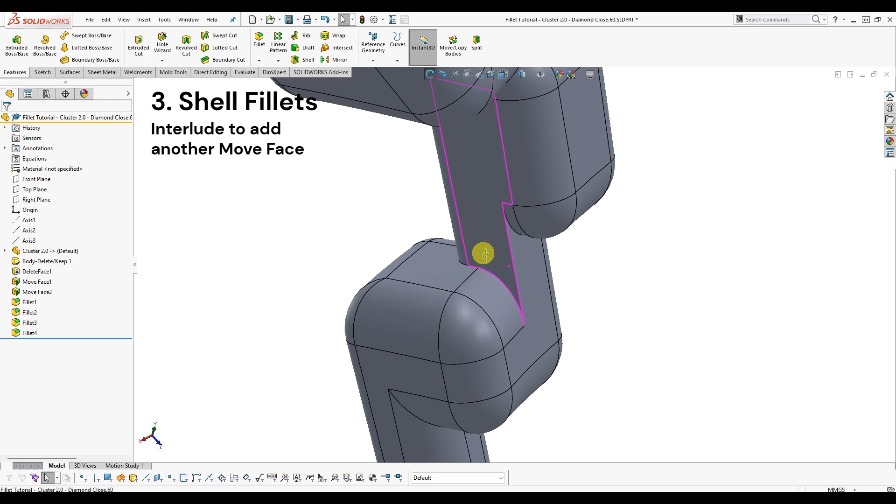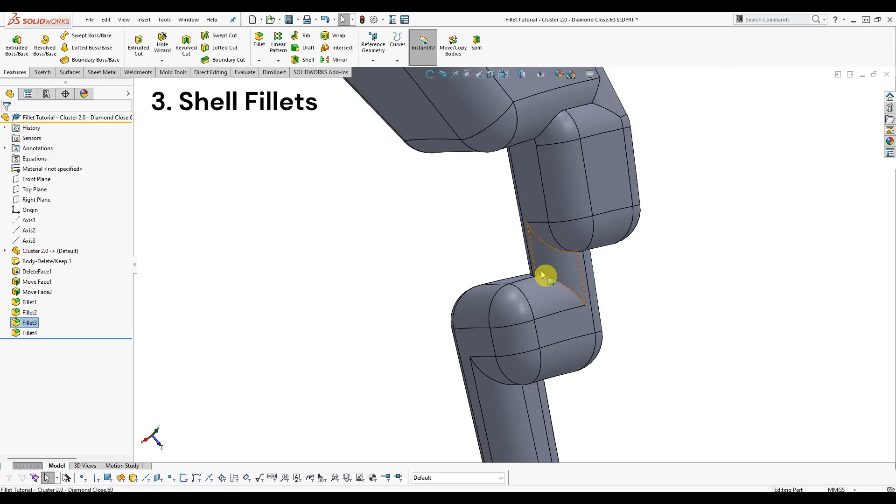That left this behind. But we can do something about that. Notice that it has 3 segments to it. This is a radial edge that didn't exist before. So what we can do is we can go to our radial edge fillet and add these guys to the fillet. Yeah, that's probably the right one to do it. And now our shell fillet makes that a lot prettier.

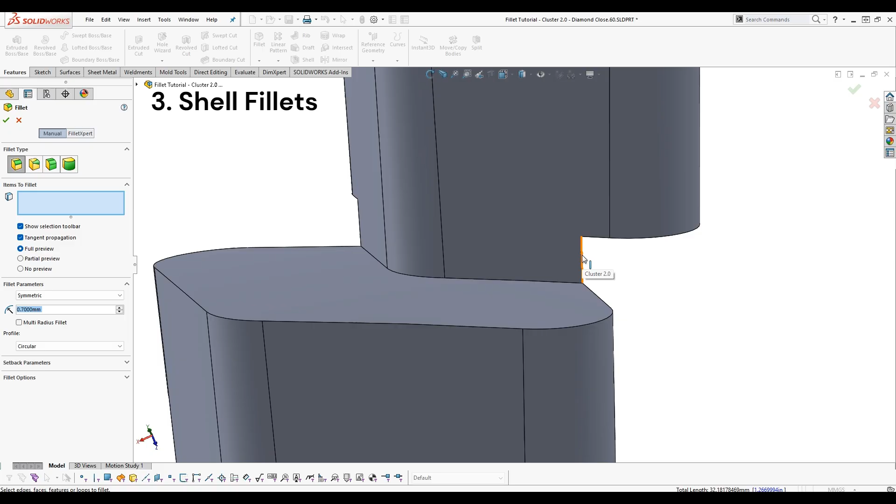Now, since that's really small, I think I'm going to make that a teeny tiny fillet, actually. So I'm going to take these guys out of here. This fillet doesn't matter to the mechanism, so I'm just going to make it not a sharp edge, because sharp edges are stress concentrations. I don't know, 0.4. Cool. So that's leaving a good amount of material behind. 0.3. Cool. And then wonderful. Like I said, sharp edges are stress concentrations.

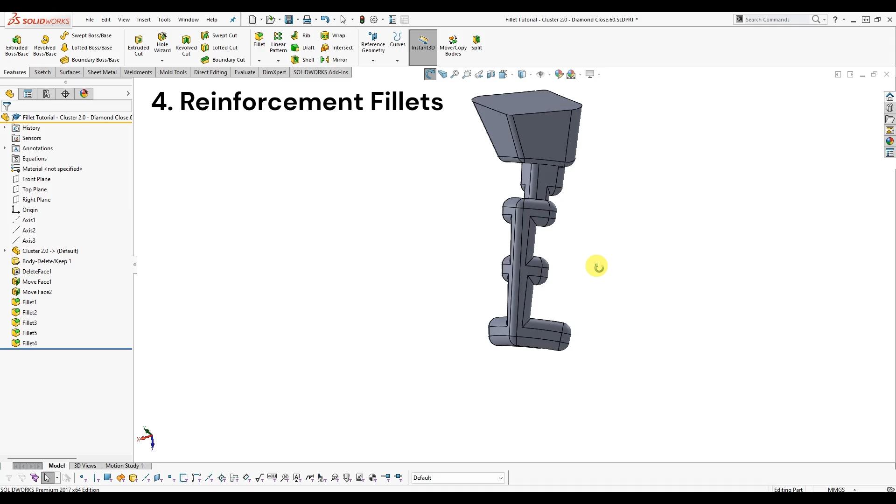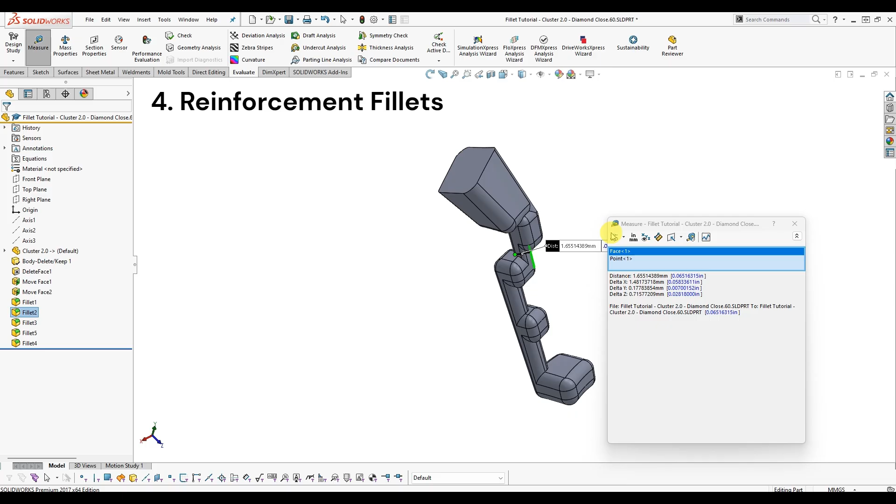So let's move on to the 4th kind of fillets that I do, which is reinforcement fillets. I look at the part and I think about whether it's going to break. I sometimes open the measurement tool, which is in Evaluate, Measure, but I have it set with an easy shortcut so that I just type M and this comes up. I do things like measure from here to here. That's like 1.6. That's iffy. I can probably make it work though. But I think I'd rather have a fillet there.

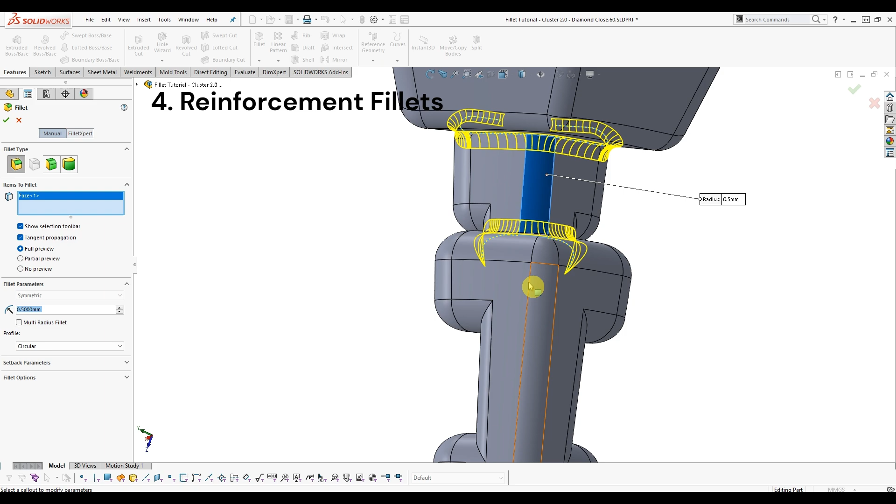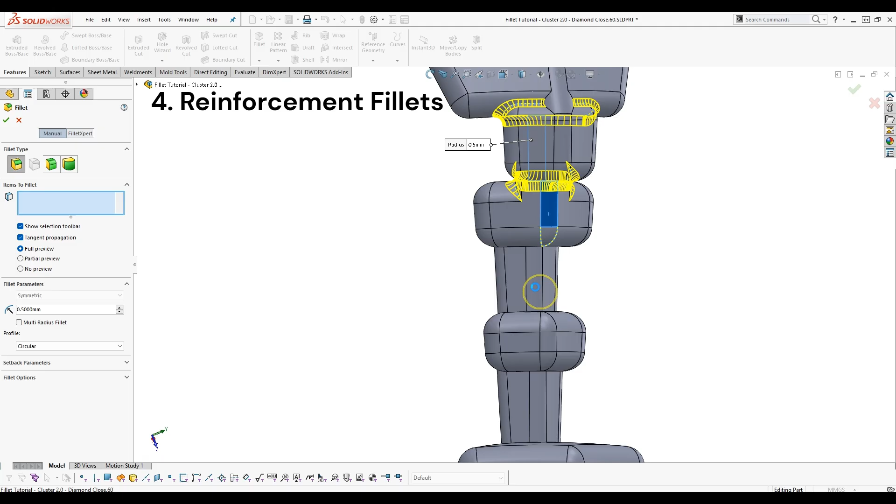Okay, time to add some reinforcement fillets. Put one here. Oops, there we go. I like to keep these around 0.5 or 0.6 millimeters, so that when they interact with the convex fillets on the other pieces next to them, they won't interfere. But just 0.5 millimeters is probably very helpful already for a puzzle like this. So this should really help strengthen the part. And notice I'm selecting faces and not edges because I can really get away with that here. So there we go.

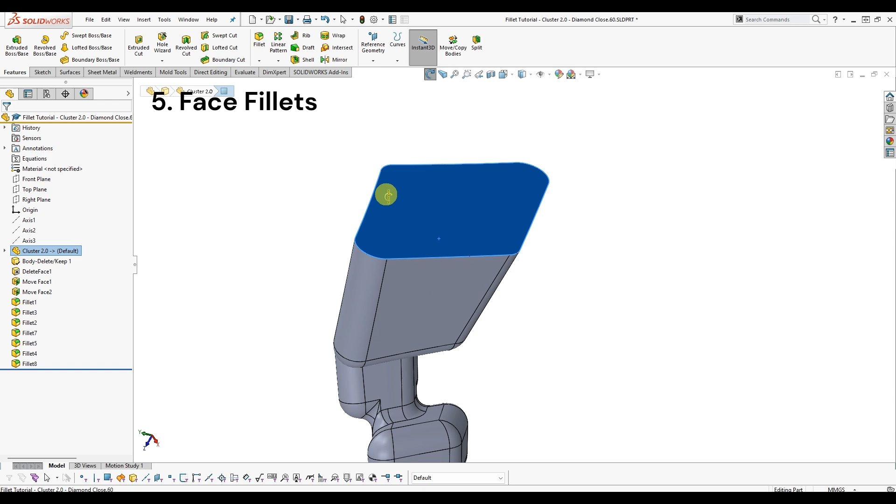Alright, moving on to the last type of fillet, which I call face fillets, because it's the outer face of the puzzle. I save these for last because they're cosmetic, and there's a slightly nicer way to do these. For these, I use a special tool called the face fillet tool. I go to the fillet tool, and instead of clicking on the constant size fillet, I go to the face fillet tool.

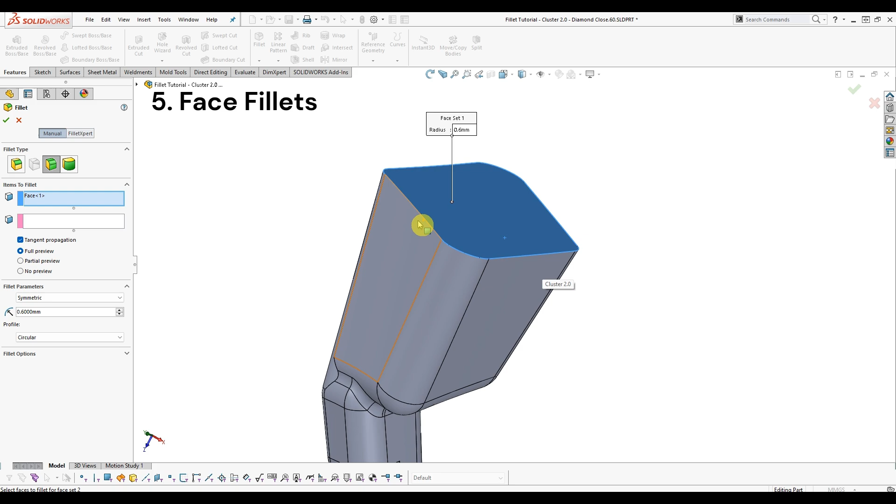That's because on a lot of pieces, not specifically this one, there will be different dihedral angles between the outer face and the radial faces on the pieces, and that will make the fillets be different sizes at different edges. So what I do instead is I use a chord width fillet, which keeps it consistent from one face to another.

Now, it does complicate stickering a little bit, so your mileage may vary with this. This may be overkill, but I like to use the face fillet feature, and I think it's worth looking into if simply filleting the edge with a constant size fillet causes you problems.

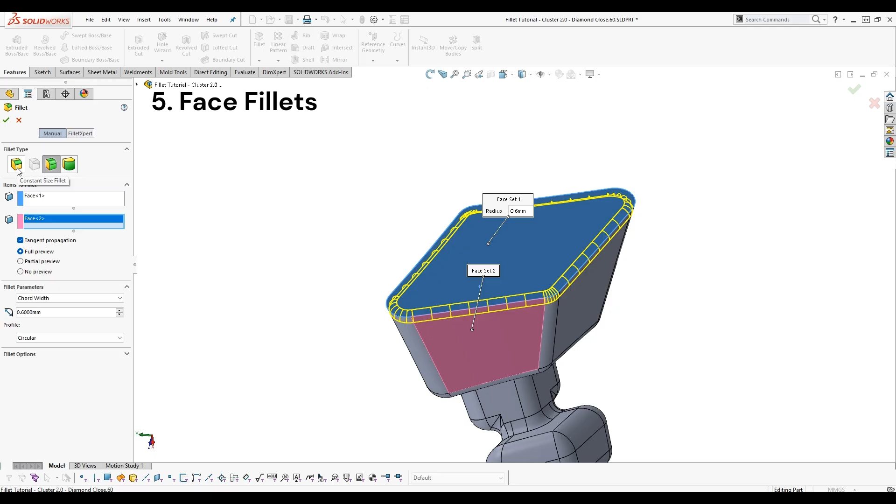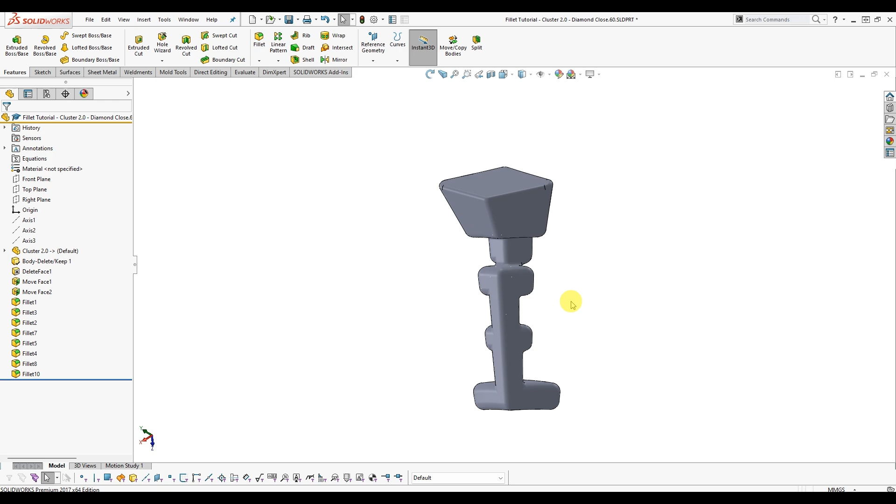So there we go. This is a fully cleaned up piece. I'm going to turn off tangent edge view because it looks pretty good. This part is ready to be printed. Time to move on to the next one. I hope this tutorial was a helpful deep dive into the inner workings of SolidWorks for twisty puzzle design.